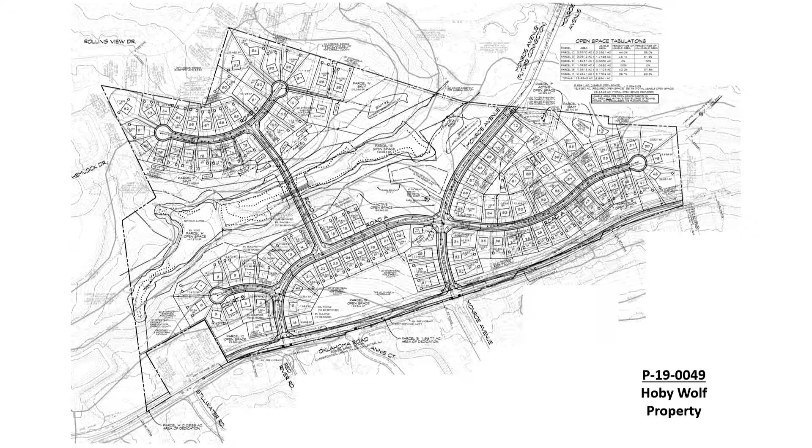If I could, I think with Laura's discussion with them, they're a little bit opposed to the sidewalk being here. This feature here, if you can see this rectangle shape, that's a stormwater management pond. The sidewalk basically opens into a stormwater management pond. The access is not very ideal. You'd better have it along the street.

Practical is the word that I referred to previously for the sidewalk. I think that's the question here in the discussion. Is this current connection practical? And what is a better alternative and how do we meet that alternative?

Right, you've got to talk to the neighbors and maybe they'll agree. That's still to be done. Yeah, I mean, if they allow it, then the sidewalk would get built right along Oklahoma and right to the property line. We just wanted to satisfy the comment saying the county wanted the sidewalk to the property line, and that's the only way we could get it there.

We could certainly direct the sidewalk and angle it a little bit so it's not pointing at the stormwater management pond, but angle it so that if they take off from it -- there's nothing that says the sidewalk or pathway has to be parallel to a roadway. Right, some places meander them anyway themselves. They try to go down some of these, see some of the streetscape that's going on around. But we're flexible with that stuff.

And we don't have right of way, unfortunately, where we could construct a sidewalk on those properties. Right, that's one of the issues. They would have to get the right of way, they'd be actually dedicating land for the right of way and placing the sidewalk where it would normally be placed. Right, so it's not just a matter of building the sidewalk. So that would grant us an easement.

All right, good. Any other questions or comments before we move on? I would say one comment: once they connect with the road and street, you get a lot of traffic across there. Has there been any thought that the lots fronting Oklahoma Road there should be pushed back, in case at some point the county would like to construct a roundabout there? Because that's the best way to slow traffic in an area that's going to get a lot more traffic eventually. Maybe some room should be left so they can possibly do that.

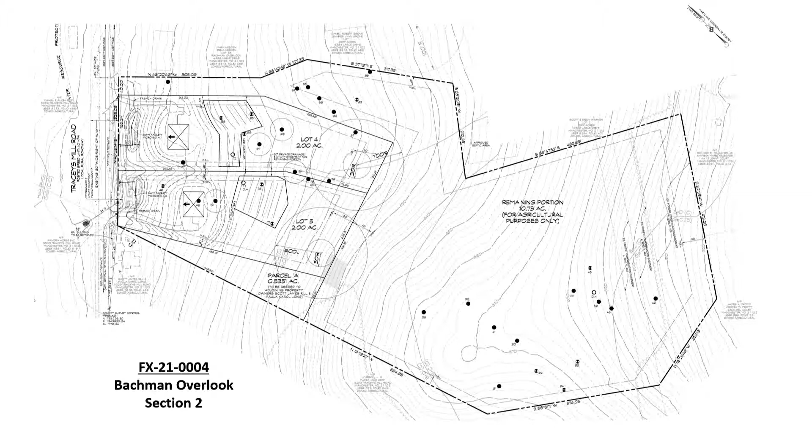The remaining portion can be subdivided one additional time for one more lot. Perc testing has become an issue in this area, which is why they went with lots 4 and 5 and put lot 6 on the back burner. It might be developed or might not, but at this time the remaining portion, if deemed buildable by the health department, is buildable per our code. They can put a driveway off that same apron for lot 4 without any additional access points.

Concerning the comment on traffic, I live about a mile out the road here on Tracey's Mill. For the last 30 years, traffic has been pretty light.

All right, anything else? Do we have any members of the public signed up to speak? David, if you can minimize this, and go to the bottom, keep going to the right, the go-to-meeting, the little orange circle right there. So are they gone now, Matt? Okay, so no, now we don't. That was probably Mr. Rob Hutter, who was very much interested in the remaining portion, and I advised him he could zoom in today and watch if he wished. So no, we do not have any members of the public on the line.

If there's no further discussion, I'd be happy to have someone formulate these motions. Pursuant to chapter 155, Planning Commission recommends approval of the preliminary and final plan subject to the 6 conditions listed on page 3 of the staff report. Is there a second? We have a motion and a second to approve the preliminary and final plan, subject to the 6 conditions. Is there any further discussion? All those in favor? Anyone opposed or abstaining?

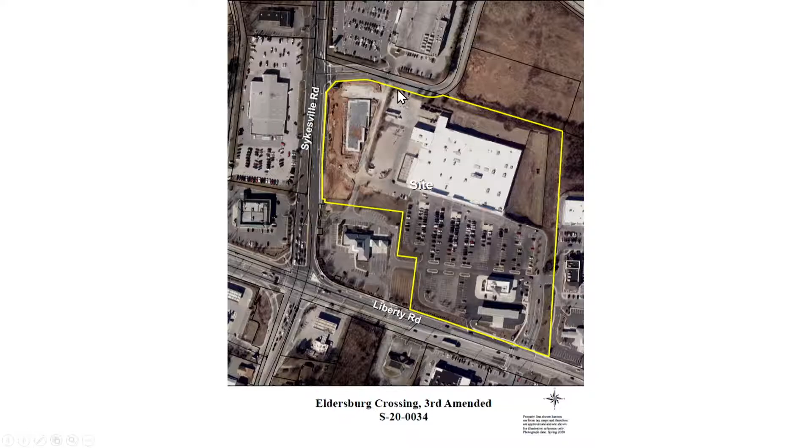With this site, now we're moving a little bit further off-site. At this site, there's two entrances existing, three technically. Two come off of Liberty Road. There's a second entrance technically you could get to from Liberty Road through this throughway, an easement over an adjacent property. And then there's another one that comes off the county road here, which is Bevard. This is a Google Earth image here.

All those entrances are existing. County engineering review is fine with it. Roads is fine with it. State highway is fine with it.

But I wanted to bring our attention to this location because this was a point of discussion for most of our discussion last couple months ago, September's meeting, was the sidewalks in this area. So again, we're kind of coming off of the structure that's being proposed. The parking's adequate. We're going to have a new trash structure there with a fence.

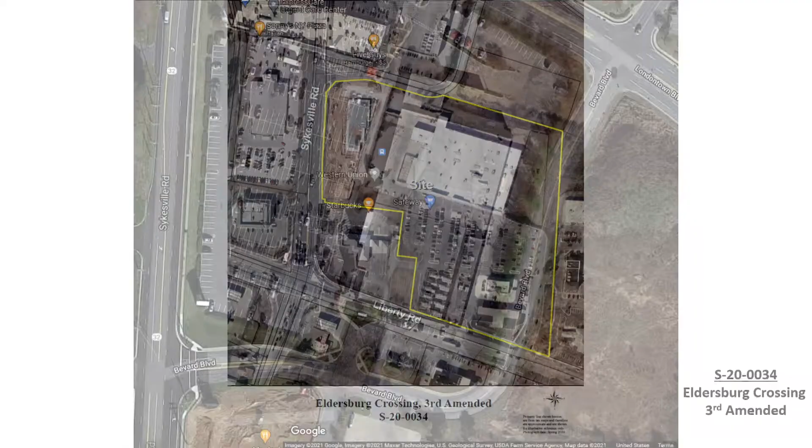Now we're looking at the side along the county public road for sidewalks. So the plans that came in last time showed sidewalks on the westernmost location of the property, connecting Route 32 sidewalk to essentially the site, which would also allow for connectivity across the street to the grocery store and the sidewalks for that development there, which has also interconnectivity throughout the area and the other stores in this region. However, what was not on the previous plan was sidewalk that continued from that point to the east to connect to adjacent property. Now that adjacent property is this site plan, Liberty Station.

This is the old Walmart site. This is the site that we're looking at now. So the Eldersburg Station shows sidewalk throughout, in particular connecting to our site. And the previous site plan did not show sidewalk in that location. The new site plan does. The new site plan does show sidewalk along the entire frontage of Bevard.

There's a note, and for anybody watching at home, I'm sure there's no way you can read that, so I'm going to read that here. It says, 'The sidewalk shown and noted as future phase will be installed at such time as Eldersburg Station is under construction.' So that's to say that the sidewalk that's noted here as that future phase will be installed, but it will be installed at the time that the Eldersburg Station is built.

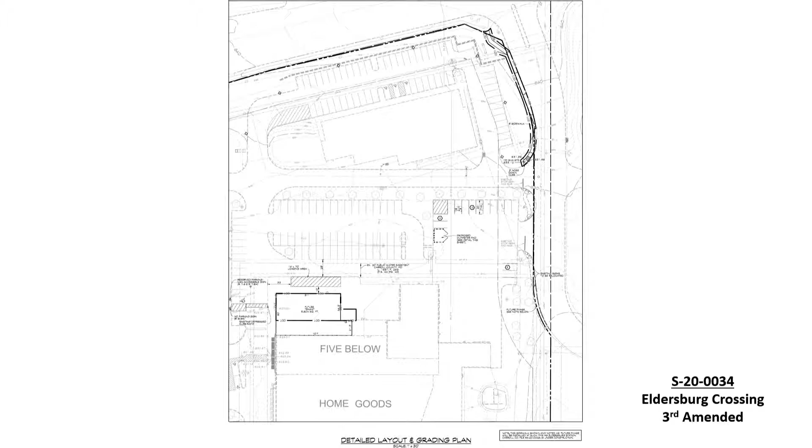So that's really the biggest change on these plans. It's a pretty simple site plan here. I'll bring you down to the next page here with our beautiful photographs.

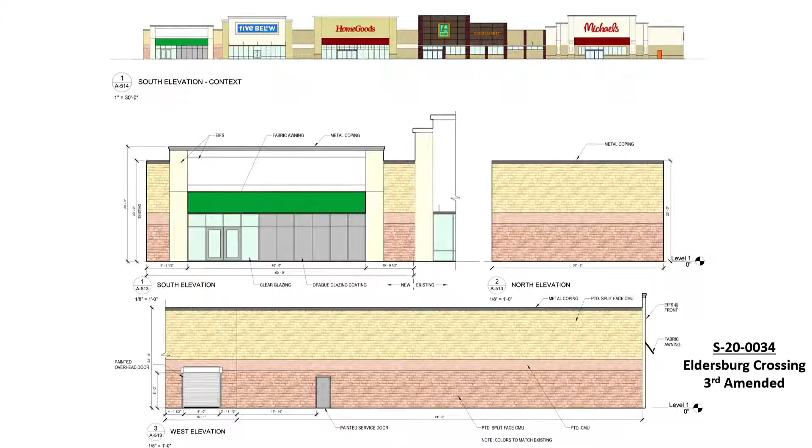Here are the elevations of the proposed structure. There's already an existing structure there, from here to there. We have an existing building, and they're just tacking on additional space. It should be pretty similar in style to the mixed styles of the existing tenants, so it should fit right in. Imagine this a little bit wider, and that's what we'll be looking at when this is all said and done.

In regard to the site plan itself, for Chapter 155, an action would be required for approval of the final site plan, with the conditions of the Public Works Agreement, including bonding for the sidewalk, and of course, if any changes happen to the site plan in the future, the plan should come back for further review. Thank you.

Mr. Ziegler or Mr. Sullivan, do you have anything to add to the report? No, I don't.

Questions from the commission? I assume parking's adequate? Yes, as mentioned previously, there was a zoning administrator case a few years ago to modify the multiplier for parking requirements for the whole site. That's applicable here too, and per those requirements, parking is adequate. In fact, we have 3 extra parking spaces than required. Yes, parking is adequate. Very good.

Do we have any members of the public that have signed up for this? No, we have no members of the public.

Before we have a motion, I just want to thank the developer for accommodating this. From our standpoint, I think it was a safety issue, not just a convenience issue, although it's that too. It's a longer-term safety issue. So while this was a minor change to the property, I know the sidewalk's expensive, and we very much appreciate your attention to that. Absolutely. Appreciate the compromise as well.

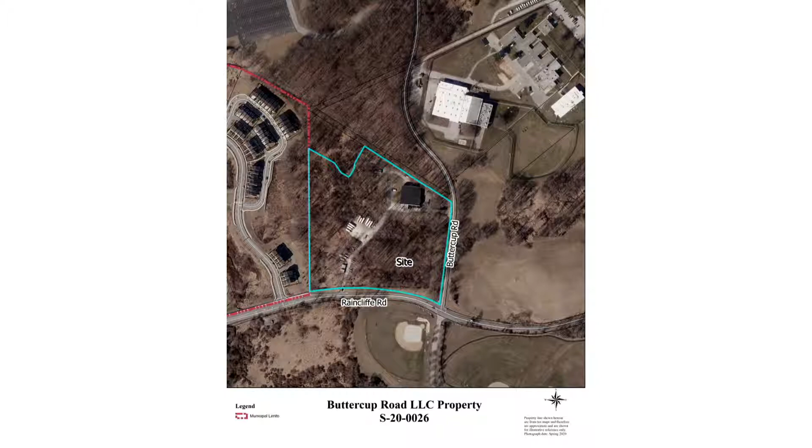Design-wise, not much has really changed since last seen in August. The developer is still proposing to add a just shy of 70,000 square foot single-story warehouse onto the southern portion of the property, shown here. The existing building and associated parking area will remain on site—they're not going to demolish this at all.

The proposed warehouse will utilize the existing access from Buttercup Road, and they are looking to remove the access from Raincliff Road. A concrete sidewalk is proposed along Buttercup Road that will extend to the extent of the property boundary and transition into a 10-foot wide paved pathway along Raincliff Road, connecting to the existing sidewalk in front of the condominium. They are also proposing a crosswalk from the intersection here to Freedom Park, for easier access for those using the sidewalk and pathway to get to the park.

As a portion of the proposed pathway lies on the subject property, the county will receive a roughly 5-foot wide pedestrian easement, so that we can continue to maintain that pathway.

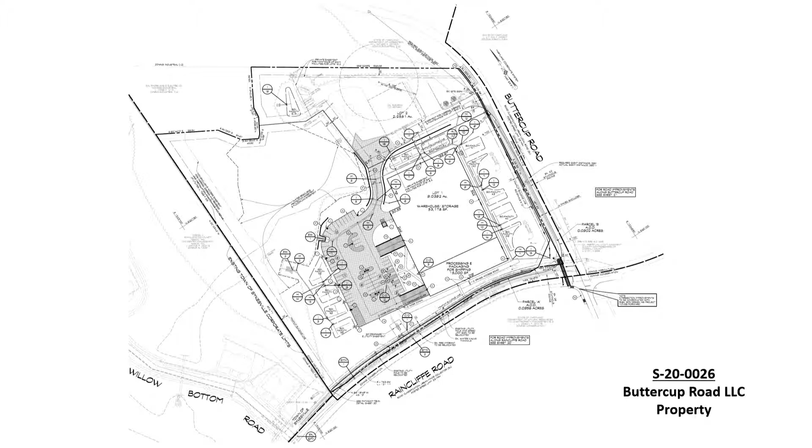On August 17th, 2021, the Planning and Zoning Commission was presented the concept site plan. The minutes have been included into your packets. The commission elected to review the final site plan. One of the biggest things discussed at that previous meeting was landscape and screening concerns from the condominium and from the roadways.

So with that, I'll go to the landscape plan here. There is landscape proposed along Buttercup Road, along Raincliff Road, and then also along this portion here that abuts that condominium.

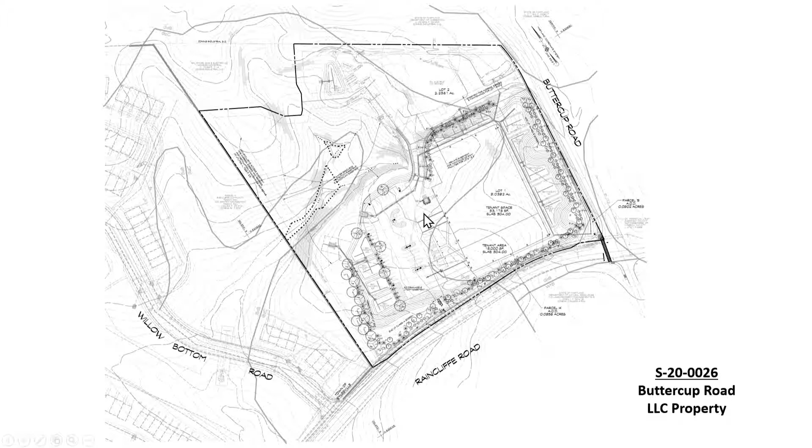And there are also some trees proposed throughout the site here. And also provided by the developer engineer is this sketch as well.

So it was mentioned at the previous meeting that the landscaping may not be as necessary as thought by the planning commission, due to the contours of the land. This will aid in that argument, showing how the contours have the headlights going towards the top of the houses. This is a general tractor trailer, and you can see this line for the headlights that runs through here and here. These squares would be the top of the townhouses themselves. So this was provided to help show the commission and aid in the concerns that were brought up previously.

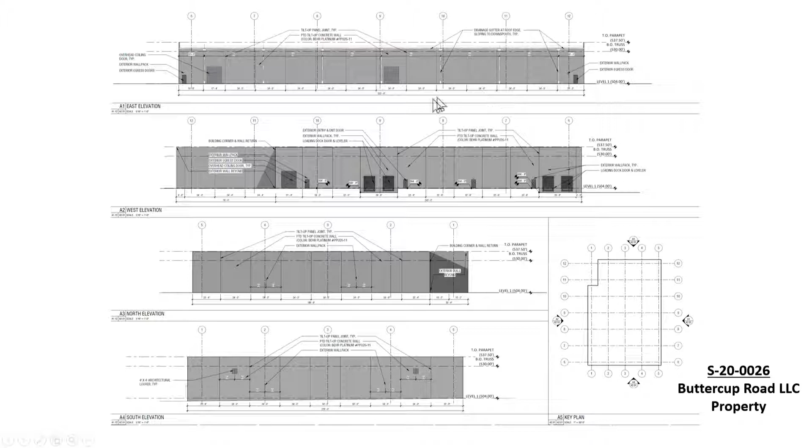I'll go back one slide. So this is the elevations of the proposed warehouse. I believe there's been no changes to this since the previous plan.

So with that, the final plan has received approval by the Carroll County Health Department and the Bureau of Utilities with public water and sewer connections. The plan has received final approval from Water Resources and Floodplain Management, with easements being required for both. Landscape and Forest Conservation have granted final approval with bonding required for both.

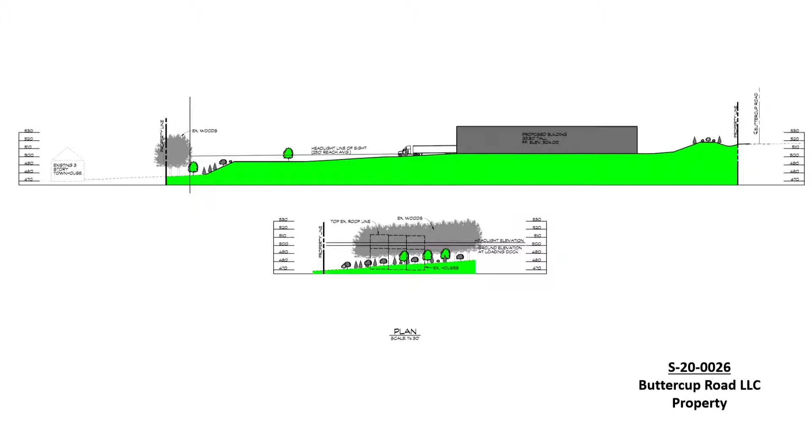That's what we believe. Talking with Mr. Nave, very rarely is there any truck traffic during the evening. It's all done during the day. They have 24-hour shifts, but that's more warehouse work, not delivery work. That normally occurs - I'm not saying it's never going to happen, but it's minimal.

You're absolutely right, it also depends on the time. If it gets dark at 5:30, you might have a truck. But during the summertime, when it gets dark at 8:30, you won't see any trucks at night. So we believe, after looking into it in some detail, we feel comfortable that it's not as much of an issue as people were believing.

As the trees mature that we're planting, that's going to catch some of the lower growth, but it takes a couple years to get that started and the screening to happen, because the elevation differential is 30 feet. We did bring some trees closer to the parking lot, so some of that elevation is made up by planting up the hill versus down the hill. We're doing them in both locations, so ultimately there should be pretty sufficient screening.

We're here to answer any questions. Mr. Nave's looking forward to bringing his company to Carroll County, and this is a great location for him. We're looking forward to having it. Thank you, any other questions?

The lighting - is it going to be wall mounted in the dock area, or pole lighting? We mentioned poles earlier, is it going to be pole casting towards the building, or wall mounted? It's going to be poles, and the reason why is for safety.